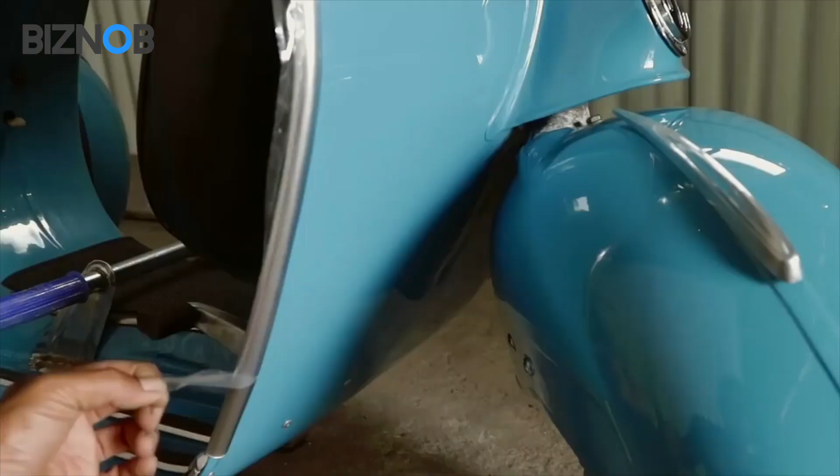Today, we're taking you on an exclusive journey into the world of Vespa scooters. Ever wondered how these iconic scooters are crafted? From their sleek design to their efficient engines, we'll explore the meticulous process that goes into making each Vespa. Stay tuned as we uncover the secrets behind one of the most beloved names in transportation. Let's get started.

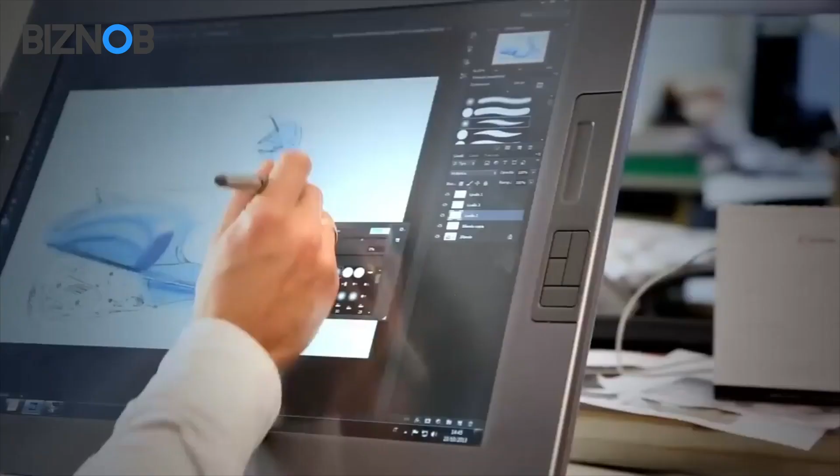1. Design and engineering. The process of designing a Vespa begins with extensive research and development to create a blueprint that balances functionality, aesthetics, and safety. Designers work closely with engineers to translate conceptual sketches into detailed technical drawings using computer-aided design (CAD) software. This stage involves brainstorming ideas, exploring various design concepts, and conducting feasibility studies to ensure that the final design meets the brand's standards and objectives.

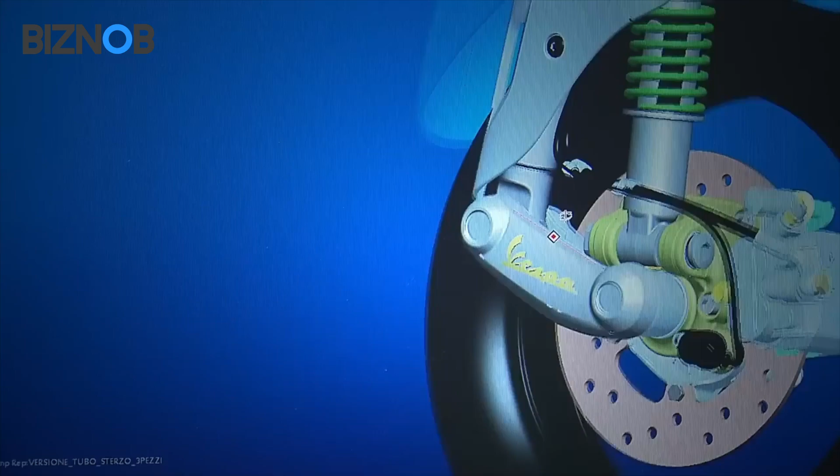Once the initial design phase is complete, engineers conduct virtual simulations and prototypes to test the scooter's performance, durability, and safety features. This iterative process allows them to identify potential design flaws or manufacturing challenges and make necessary adjustments before moving to the production stage.

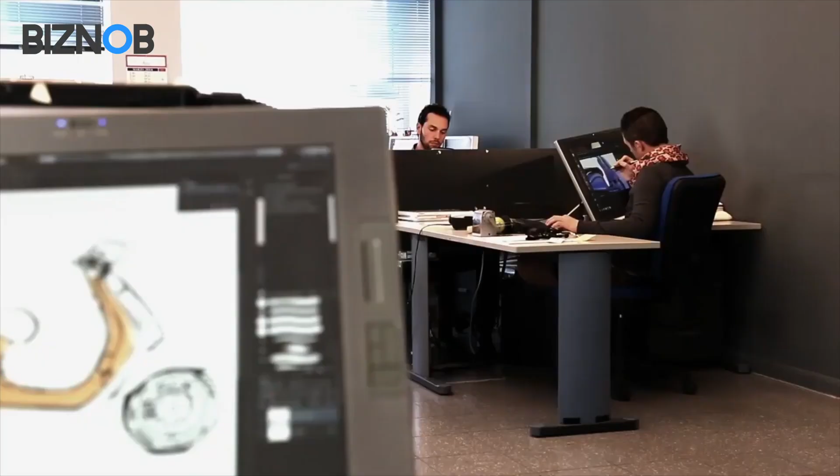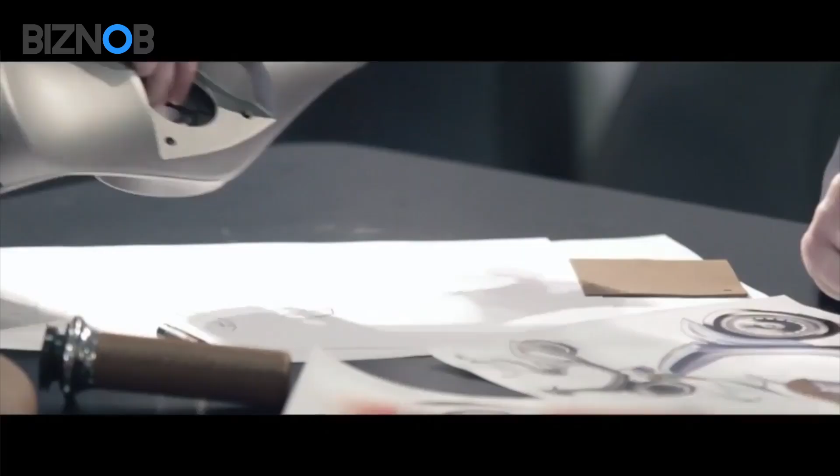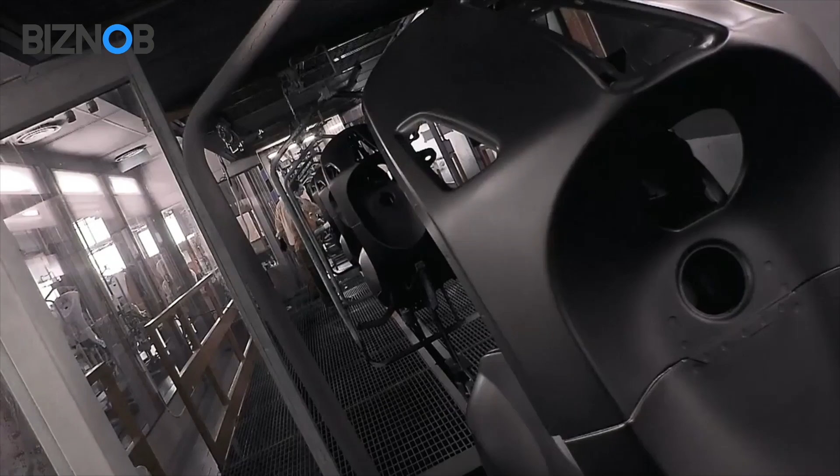2. Material selection. Selecting the right materials is crucial for ensuring the quality and durability of the Vespa scooter. Engineers consider factors such as strength, weight, corrosion resistance, and cost when choosing materials for different components. Vespa scooters are renowned for their steel bodies, which provide rigidity and structural integrity while maintaining a lightweight design. High-quality steel alloys are selected for their strength-to-weight ratio, allowing for optimal performance and durability.

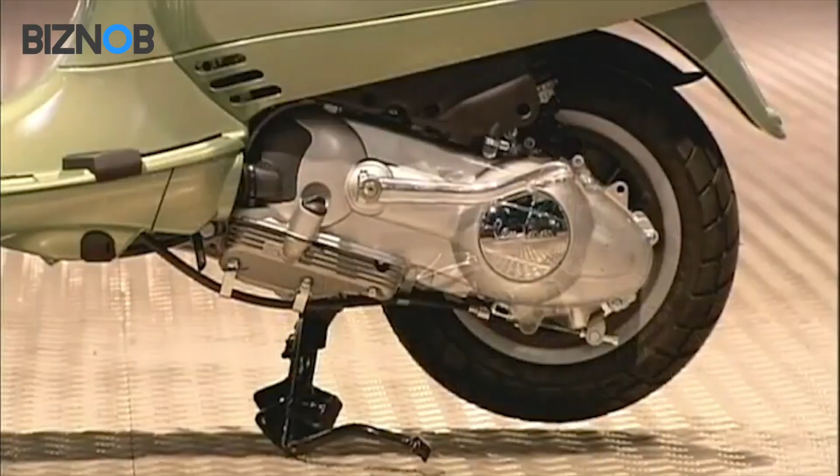In addition to steel, other materials such as plastics, rubber, aluminum, and composites are used for various components such as body panels, trim pieces, seats, and handlebars. Each material is chosen based on its specific properties and suitability for the intended application, ensuring that the scooter meets stringent quality standards and regulatory requirements.

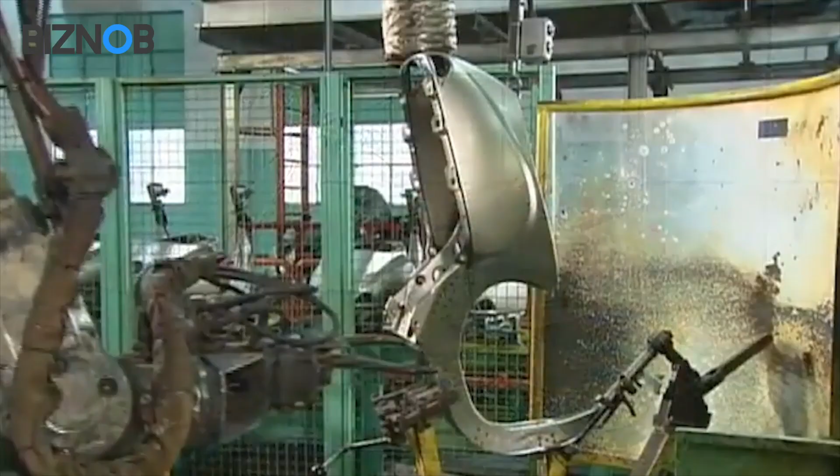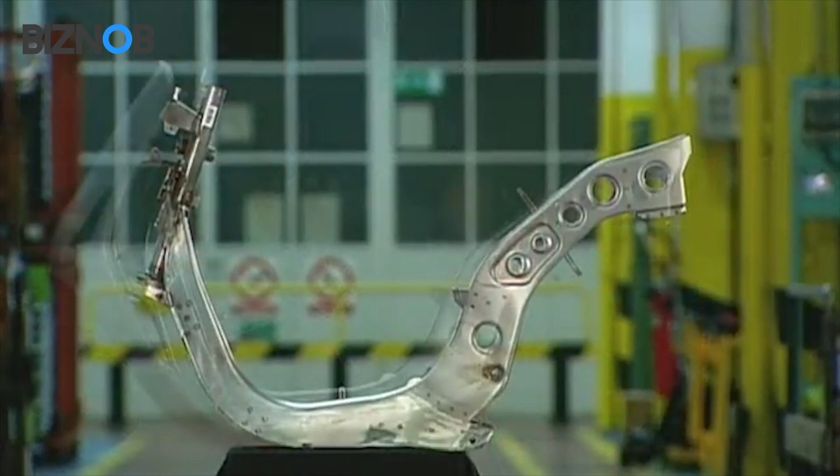3. Chassis fabrication. The chassis serves as the backbone of the Vespa scooter, providing support and structural integrity. In the fabrication process, 3 pieces of molded steel are joined together using robotic welding technology. These precision welds create a seamless and robust chassis that forms the scooter's foundation. The use of robotics ensures consistency and accuracy in the welding process, resulting in a high-quality finished product.

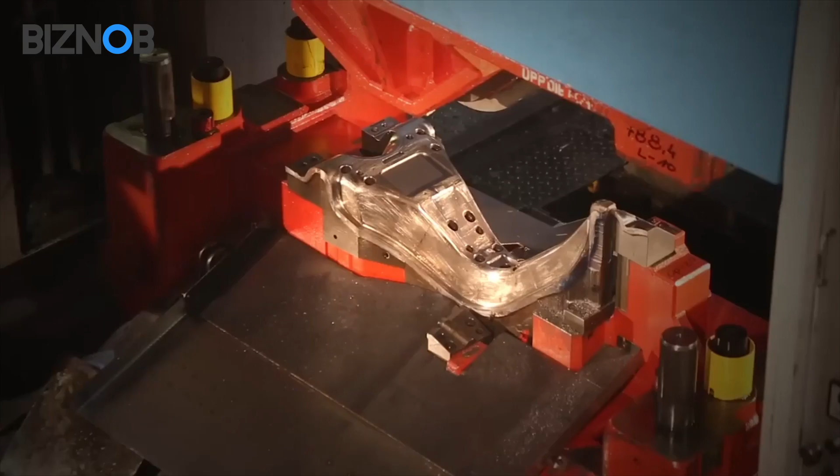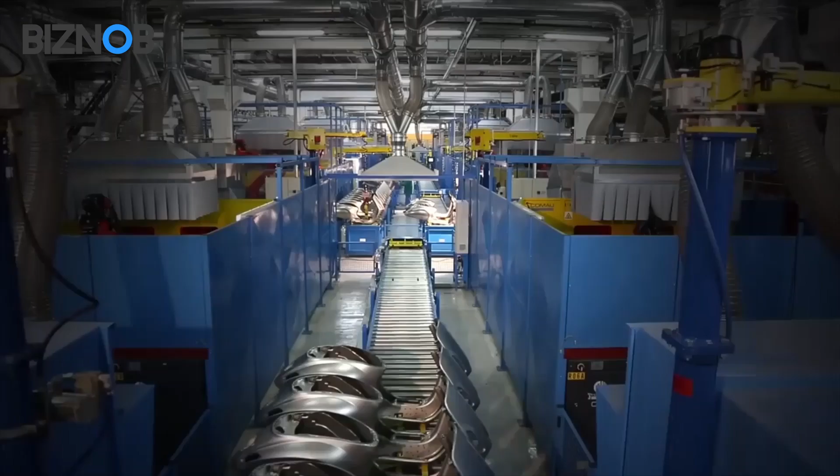After welding, the chassis undergoes additional processing steps such as rust-proofing, priming, and painting to enhance its durability and aesthetic appeal. This meticulous fabrication process is essential for ensuring that the Vespa scooter meets the brand's standards for quality, reliability, and performance.

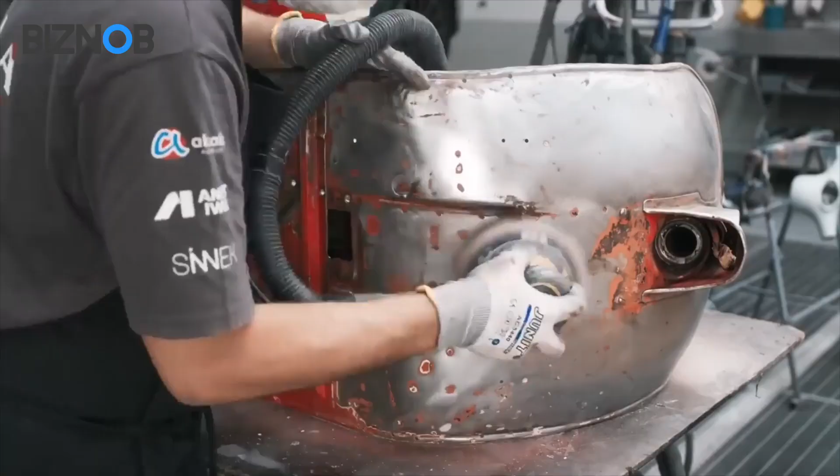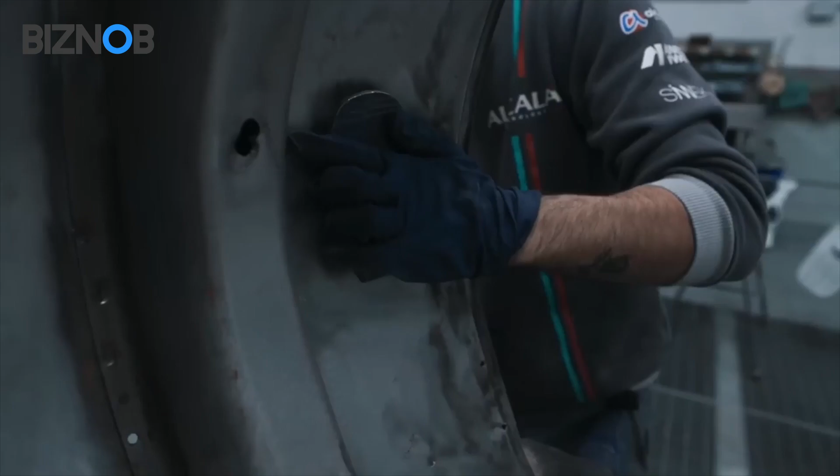4. Rust-proofing. To protect the steel chassis from corrosion and rust, it undergoes a specialized rust-proofing treatment. This involves applying chemical coatings or treatments to the metal surface to create a barrier that prevents moisture and oxygen from reaching the steel. Rust-proofing is especially important for scooters that are exposed to harsh environmental conditions such as rain, snow, and salt on roads.

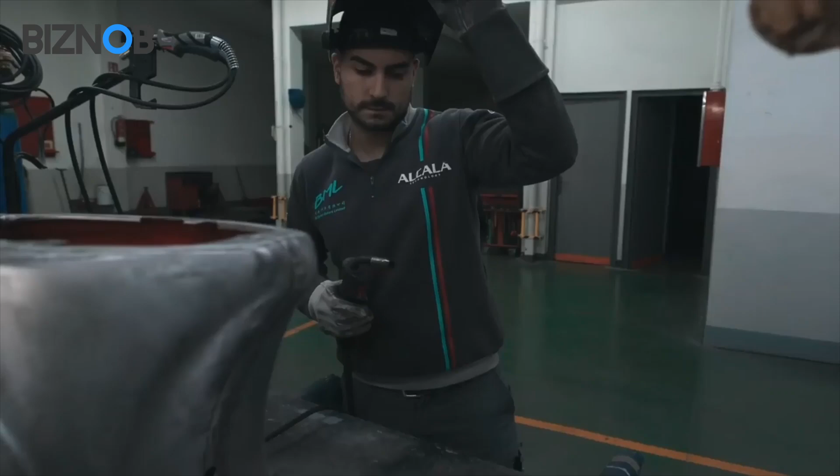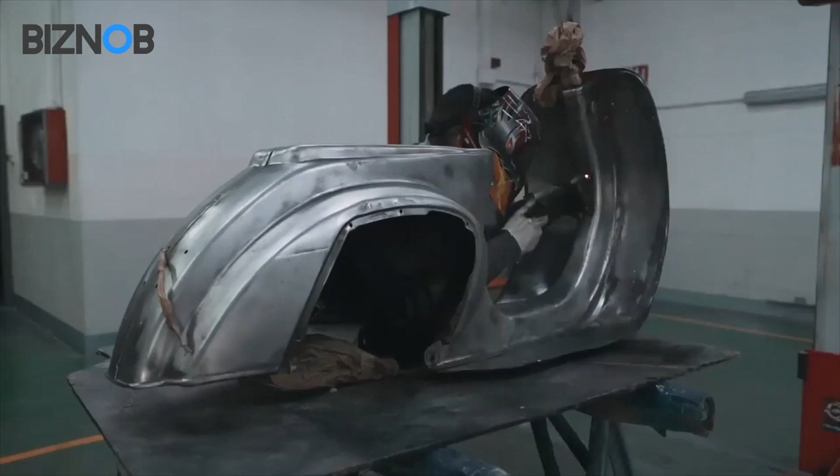The rust-proofing process may include techniques such as electroplating, hot-dip galvanizing, or applying corrosion-resistant coatings. These treatments provide long-lasting protection against rust and corrosion, extending the scooter's lifespan and maintaining its structural integrity over time.

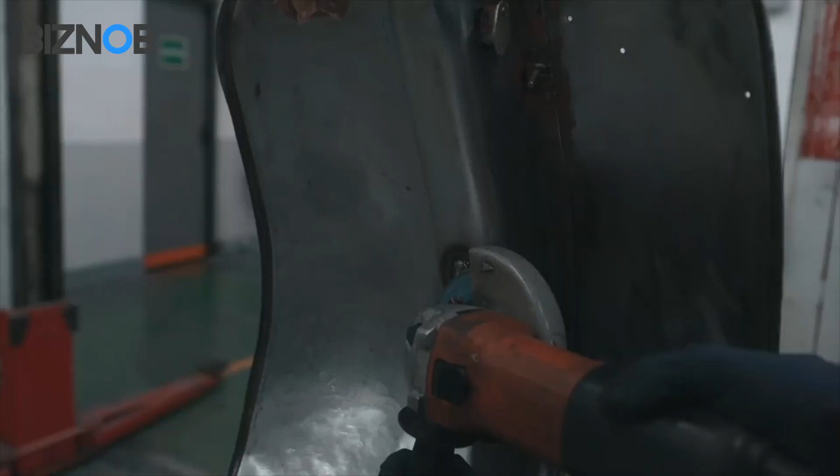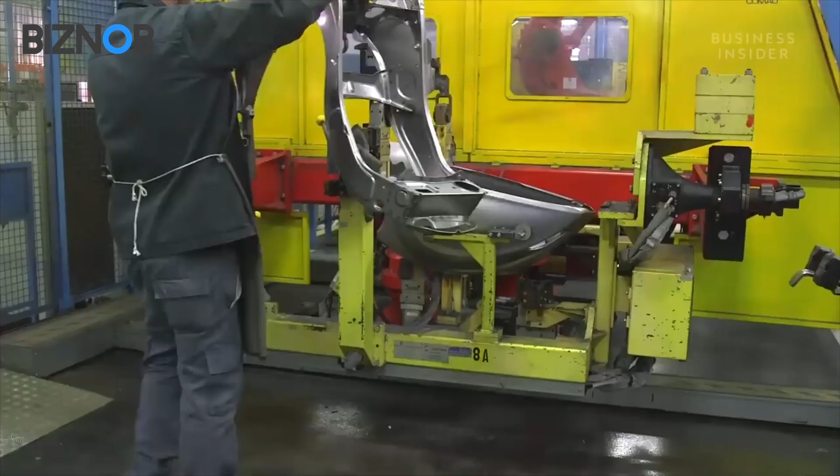5. Priming. After rust-proofing, the chassis is primed to prepare it for painting. Primer serves as a bonding agent between the metal surface and the paint, ensuring better adhesion and durability of the finish. The primer also helps to smooth out any imperfections in the metal surface and provides a uniform base for the paint layers. Different types of primers may be used depending on the scooter's final color and finish.

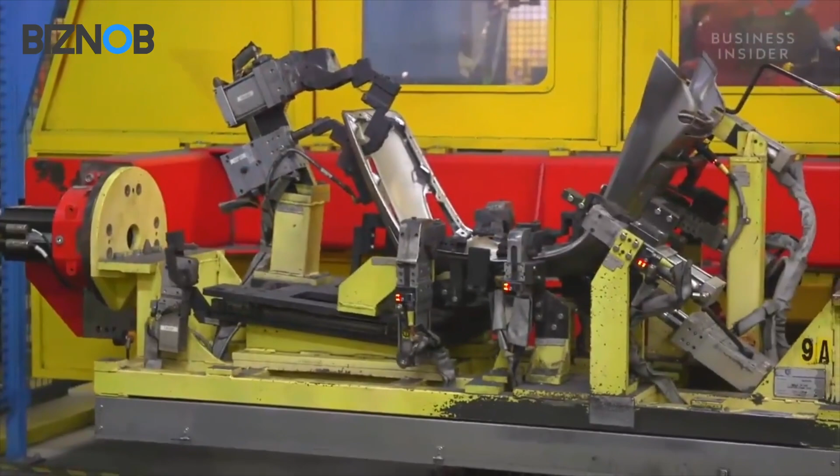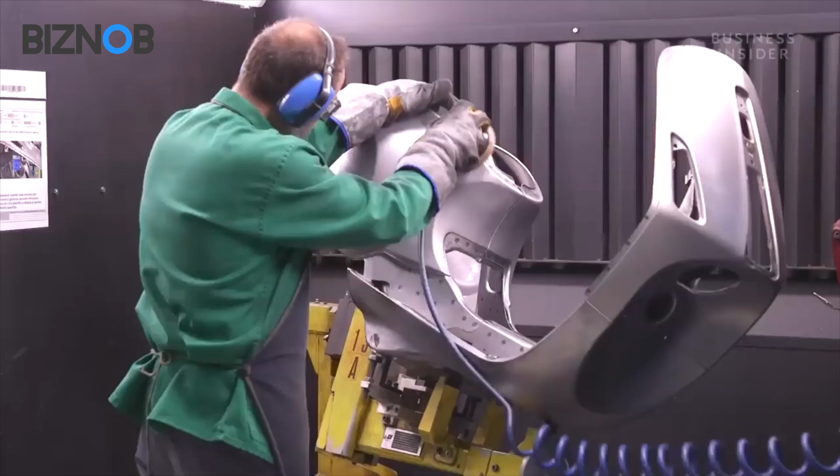For example, a black or gray primer may be used for darker colored scooters, while a white primer may be used for lighter colored ones. The choice of primer is critical for achieving the desired color vibrancy and finish quality in the final paint job.

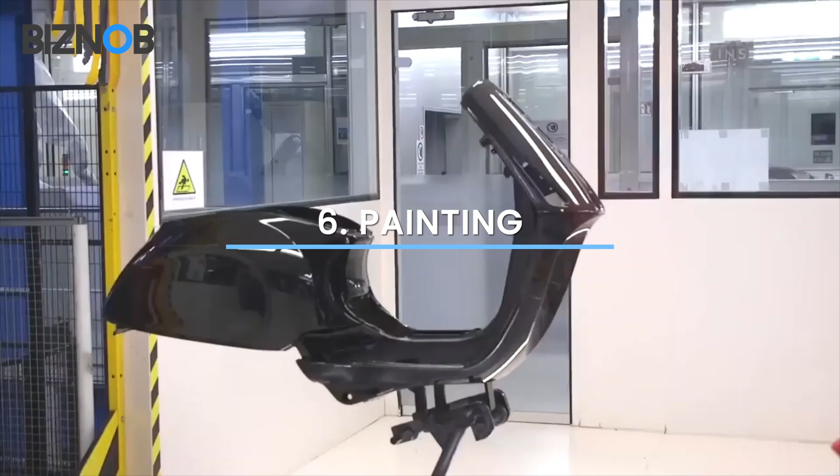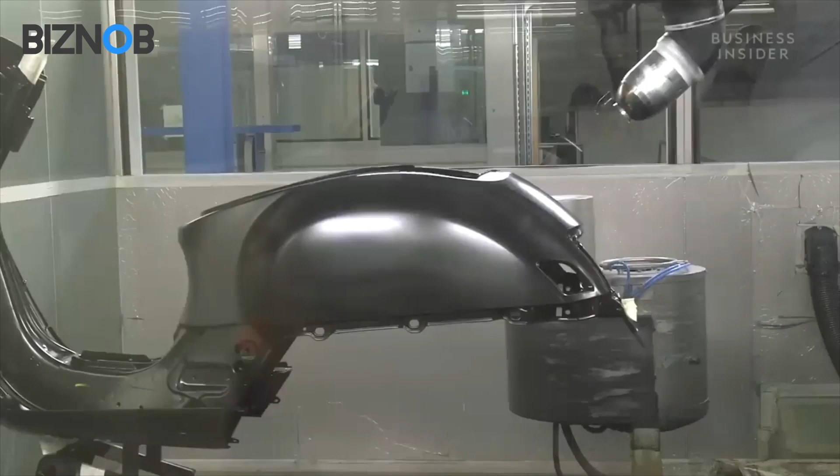6. Painting. The painting process is a critical step in creating the iconic look of the Vespa scooter. Multiple layers of paint, including a base coat, color coat, and clear protective veneer, are applied to the primed chassis. Each layer is applied with precision to ensure even coverage and a flawless finish.

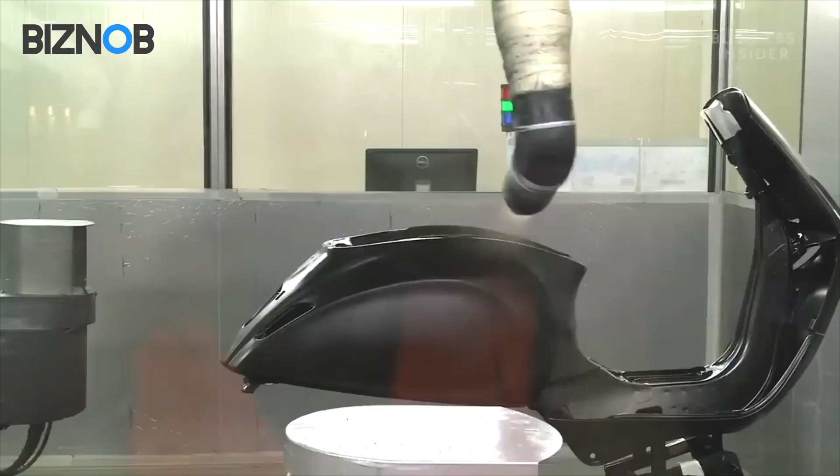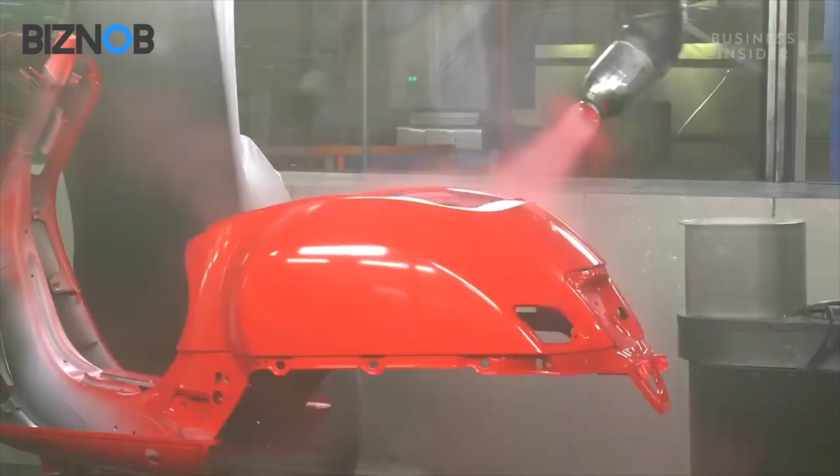Automated painting booths are used to apply the paint layers efficiently and uniformly, while skilled technicians oversee the process to ensure quality control. The paint is then cured by baking it in ovens at high temperatures, which helps to harden the finish and enhance its durability. Once cured, the painted chassis undergoes polishing to remove any imperfections and achieve a smooth, glossy surface.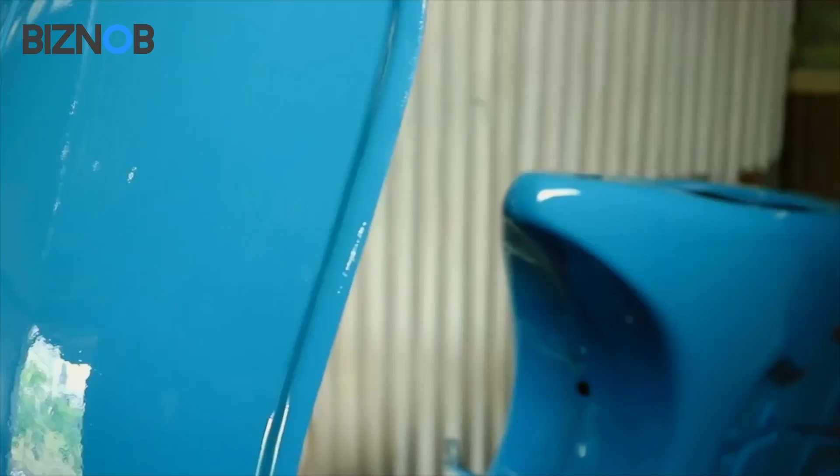7. Polishing. After painting, the chassis undergoes a polishing process to enhance its appearance and smooth out any surface imperfections. Skilled technicians use buffing machines and polishing compounds to achieve a high-gloss finish that improves the scooter's aesthetic appeal. This meticulous polishing process ensures that the paintwork is flawless and free of any blemishes or defects.

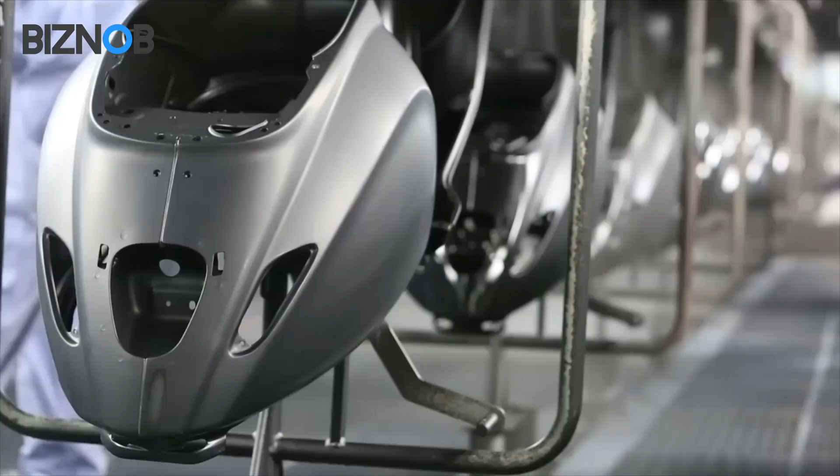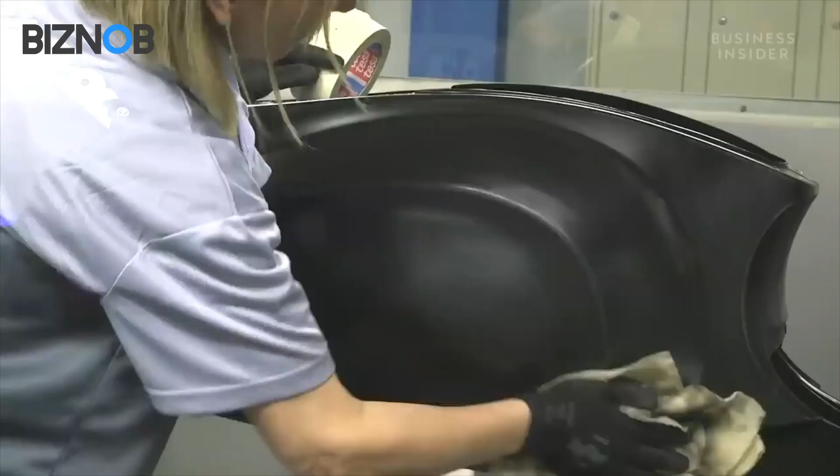Polishing also helps to protect the painted surface from environmental damage, such as scratches, UV exposure, and oxidation. By creating a smooth and reflective surface, polishing enhances the scooter's visual impact and contributes to its iconic look and feel. This attention to detail is essential for maintaining the brand's reputation for quality and craftsmanship.

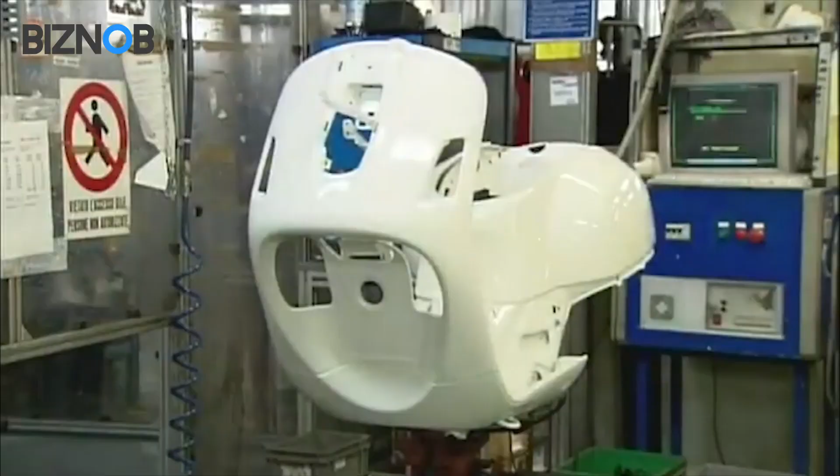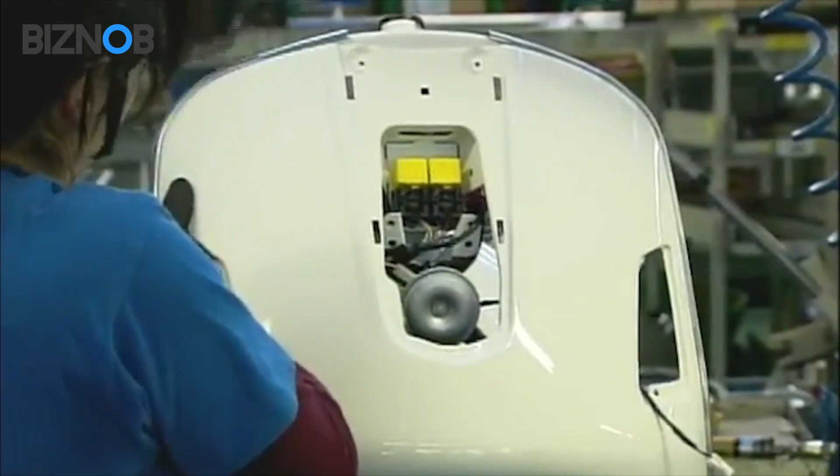8. Radiator system installation. The radiator system plays a crucial role in regulating the engine temperature and preventing overheating. During installation, technicians fit the radiator onto the chassis and secure it using mounting brackets and fasteners. They also connect the radiator's wiring and hoses to the vehicle's framework, ensuring a secure and leak-free connection.

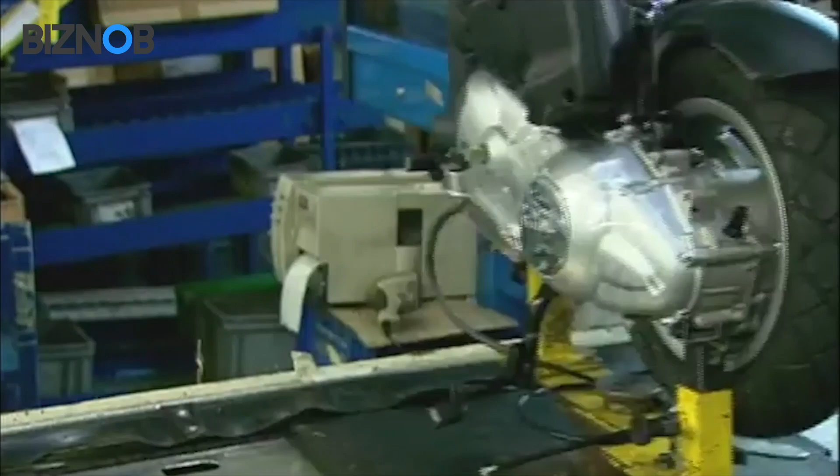The radiator system is essential for maintaining the engine's optimal operating temperature, especially during extended periods of use or in hot weather conditions. Proper installation and maintenance of the radiator system are critical for ensuring the scooter's reliability and performance on the road.

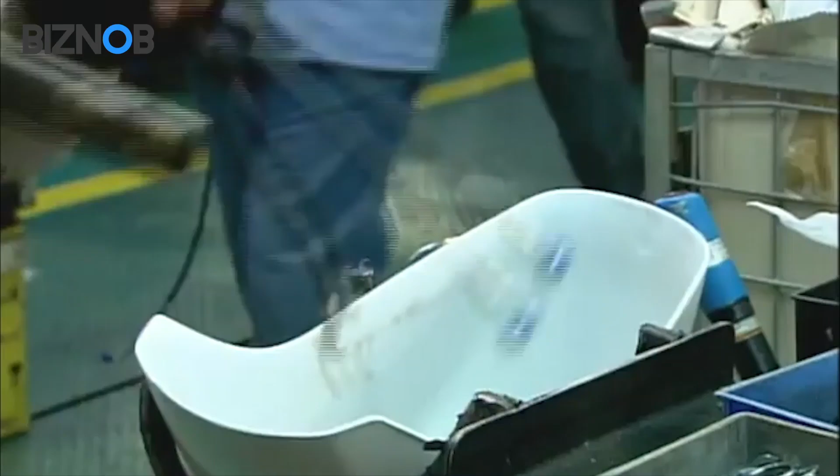9. Engine assembly. The heart of the Vespa scooter is its engine, which provides the power and performance necessary for smooth and efficient operation. During assembly, technicians install the engine beneath the passenger seat and bolt it to the steel framework of the chassis. This step requires precision and attention to detail to ensure proper alignment and attachment of the engine components.

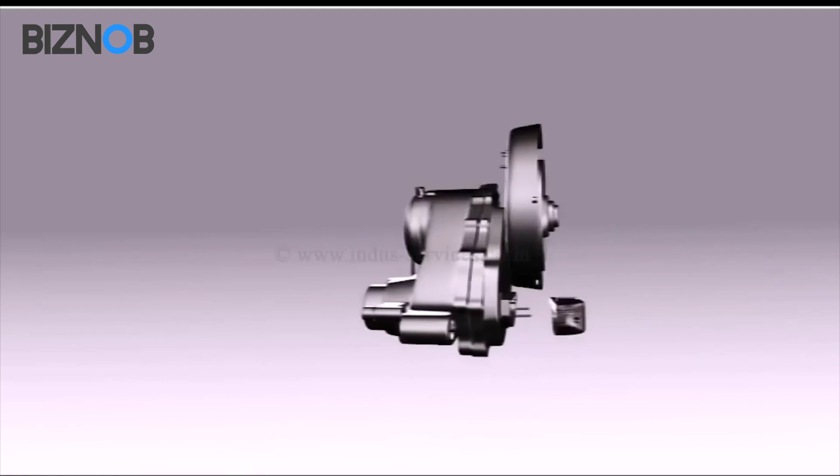Vespa scooters are typically equipped with 4-stroke engines ranging in displacement from 50 cc to 300 cc, depending on the model and intended use. These engines are known for their balance of power, fuel efficiency, and low emissions, making them ideal for urban commuting and recreational riding.

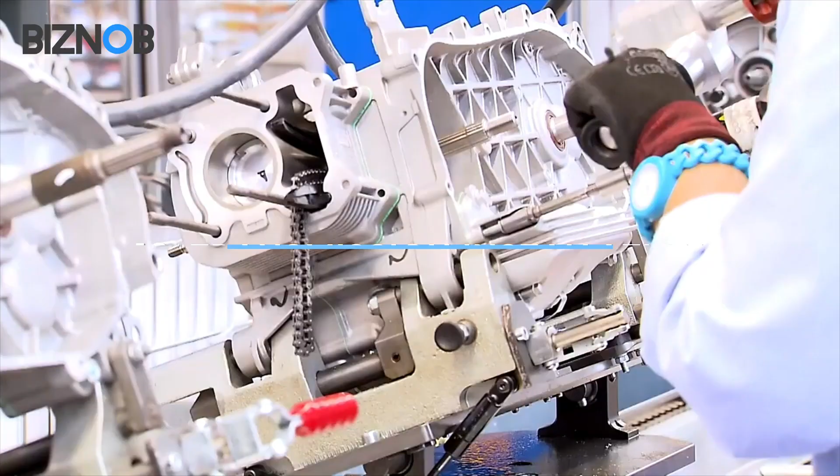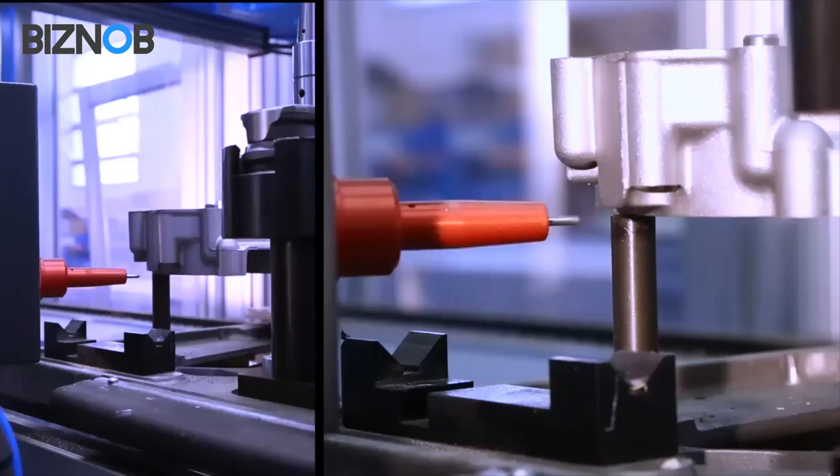10. Transmission installation. In addition to the engine, Vespa scooters are equipped with automatic transmissions that provide smooth and seamless power delivery. During assembly, technicians install the transmission alongside the engine and ensure that it is properly aligned and connected. Automatic transmissions offer ease of use and convenience, allowing riders to focus on the road without the need for manual shifting.

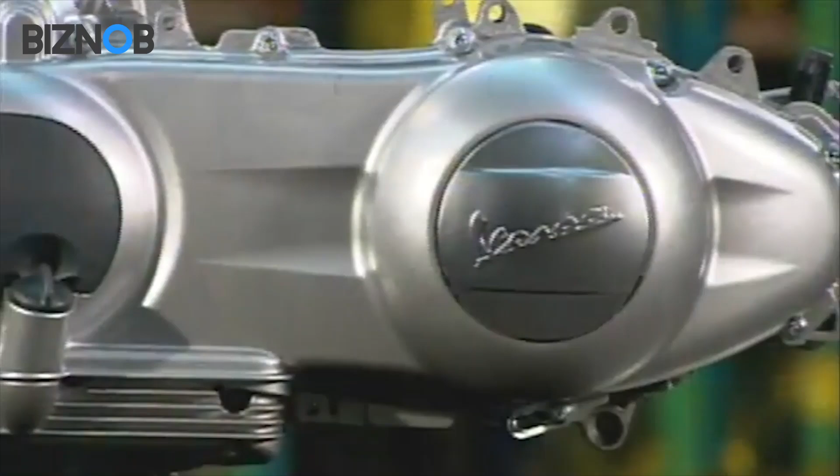The transmission system plays a crucial role in transferring power from the engine to the wheels, allowing the scooter to accelerate smoothly and efficiently. Proper installation and adjustment of the transmission components are essential for ensuring optimal performance and longevity of the scooter.

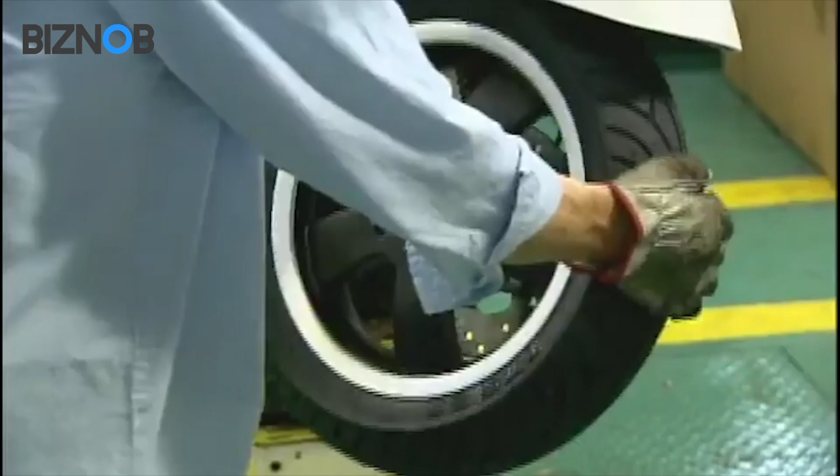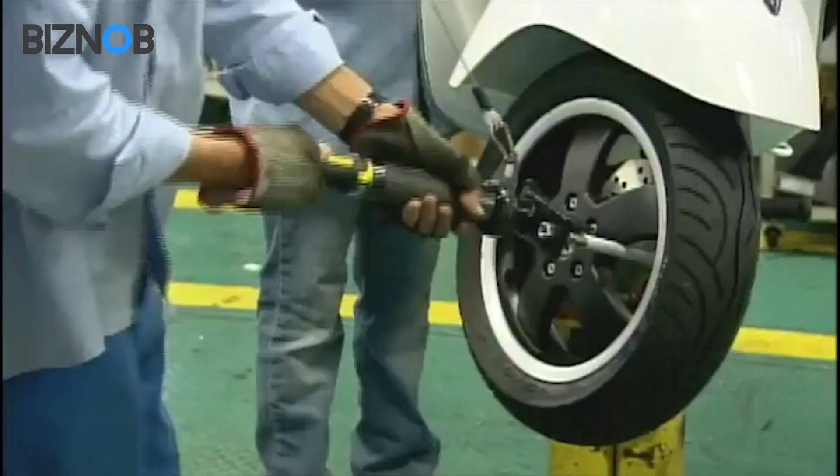11. Steering column and front wheel assembly. The steering column, which includes the front brakes and wheel hub, is assembled next and inserted into its slot at the front of the scooter body. Skilled technicians carefully assemble the steering column and front wheel, ensuring proper alignment and attachment to the chassis. The front wheel, typically equipped with a larger 12-inch rim for added stability, is then installed and secured in place.

The steering column and front wheel assembly are critical components of the scooter's steering and braking system. They allow for precise control and maneuverability on the road. Proper installation and alignment of these components are essential for ensuring the scooter's safety and performance.

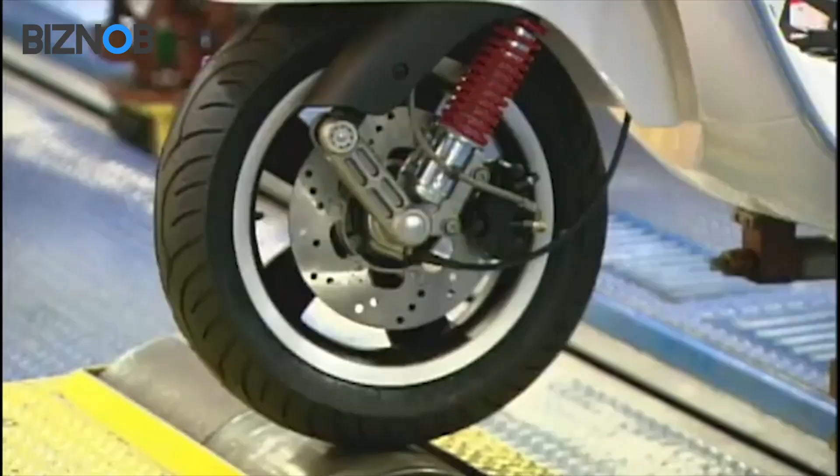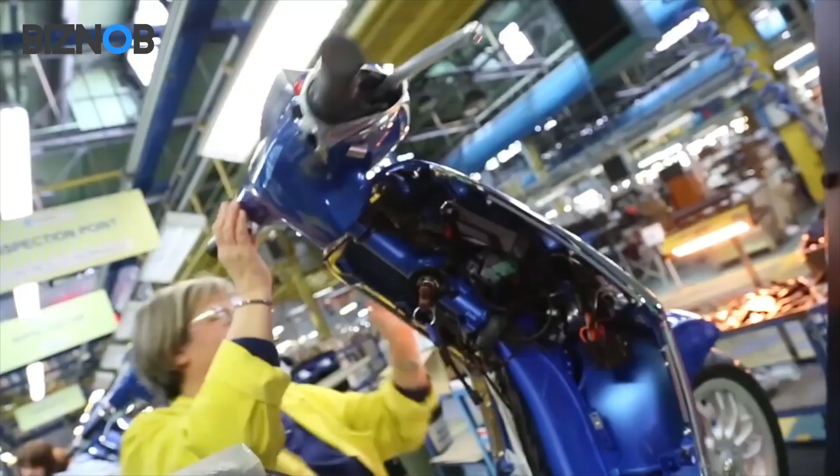12. Headlight and electrical systems. Vespa scooters are equipped with headlights and electrical systems that provide illumination and functionality on the road. During assembly, technicians mount the headlight onto the handlebar and connect it to the scooter's electrical system.

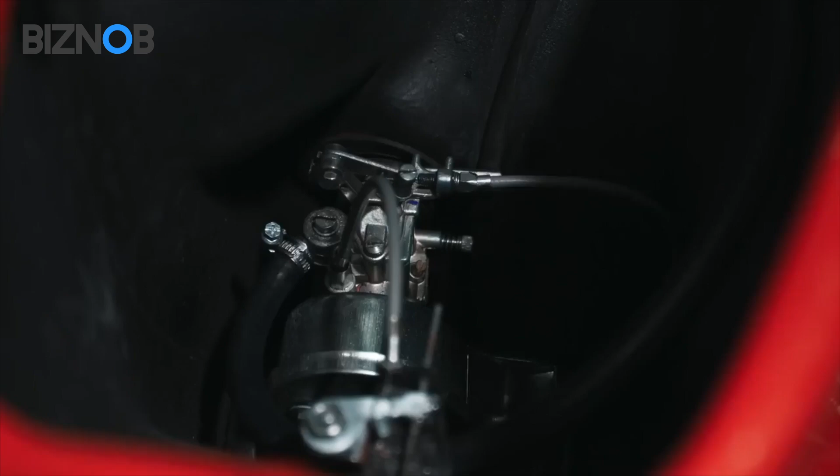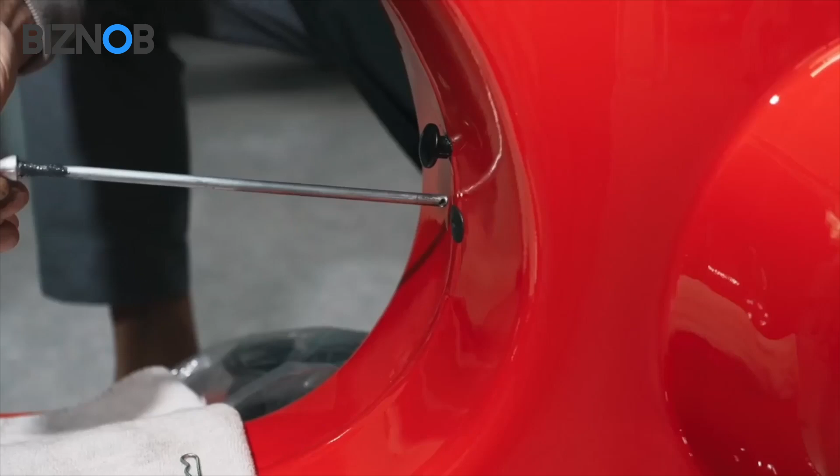They also install other electrical components, such as signal lights, speed gauges, and wiring harnesses, ensuring that everything is connected correctly and functional. The electrical system powers various scooter accessories and features, including lights, indicators, and instrumentation. Proper installation and testing of the electrical components are essential for ensuring the scooter's safety and compliance with regulatory standards.

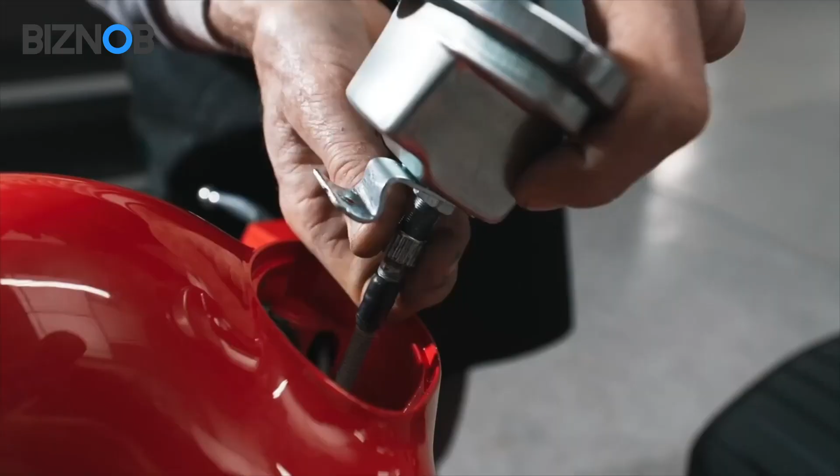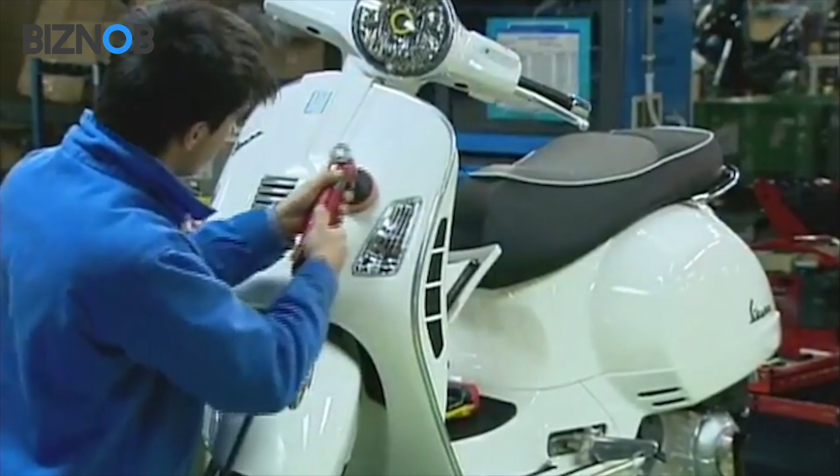13. Final assembly and accessories. Once the major components are installed, the scooter undergoes final assembly, where trim pieces, accessories, and finishing touches are added. Technicians install the horn cover, trim pieces, and saddle, ensuring that everything is aligned correctly and secured. The saddle is mounted on a hinge over a storage compartment, providing both comfort for the rider and practical storage space for belongings.

Accessories such as pop-out footrests for the passenger are also installed during this stage, enhancing the scooter's functionality and convenience. Skilled technicians pay close attention to detail during final assembly to ensure that every component is installed correctly and meets the brand's standards for quality and craftsmanship.

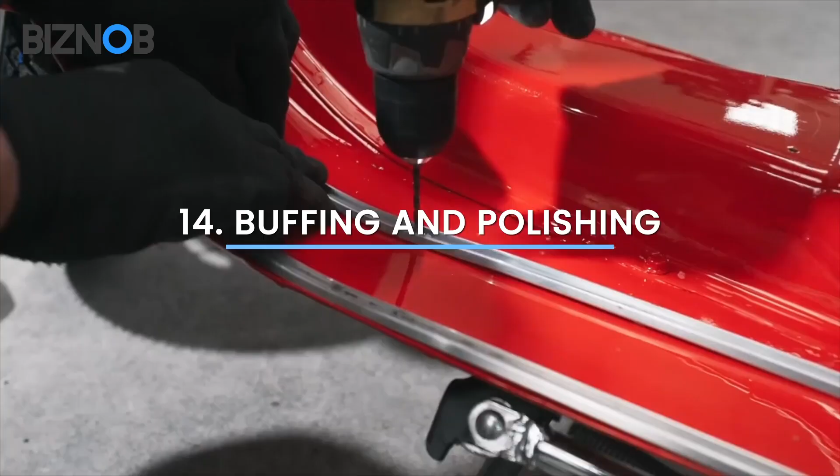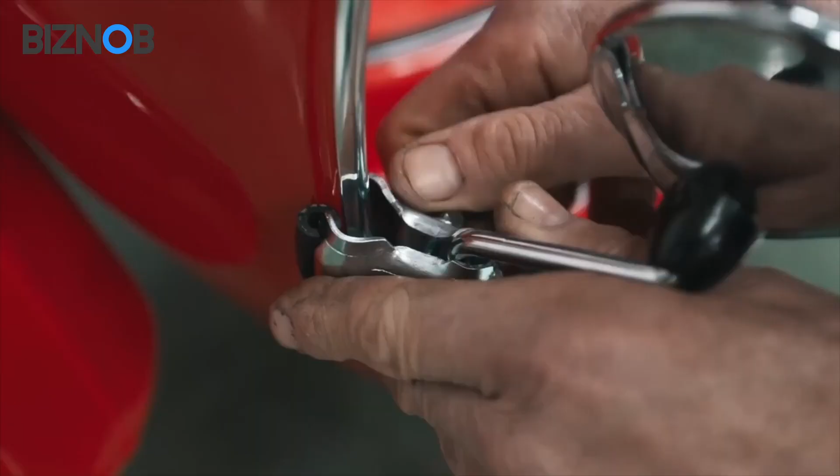14. Buffing and polishing. Before the scooter is completed, it undergoes another round of buffing and polishing to enhance its appearance and finish. Skilled technicians use buffing machines and polishing compounds to achieve a high gloss shine and remove any surface imperfections. This meticulous process ensures that the scooter has a flawless and uniform finish, enhancing its aesthetic appeal and visual impact on the road.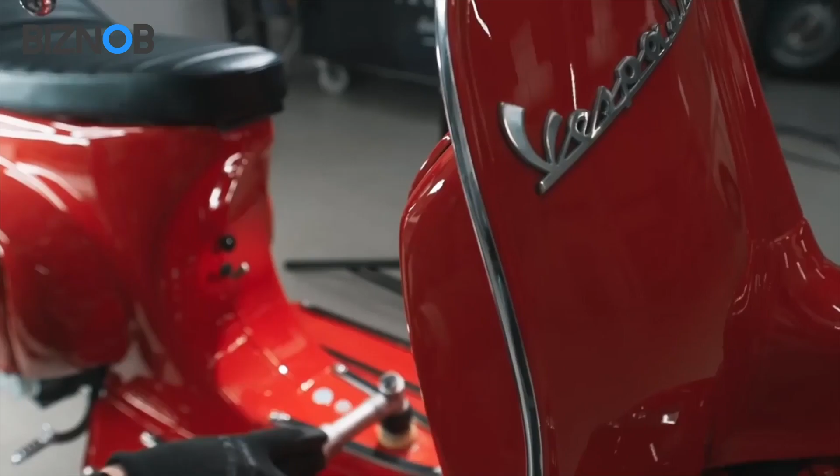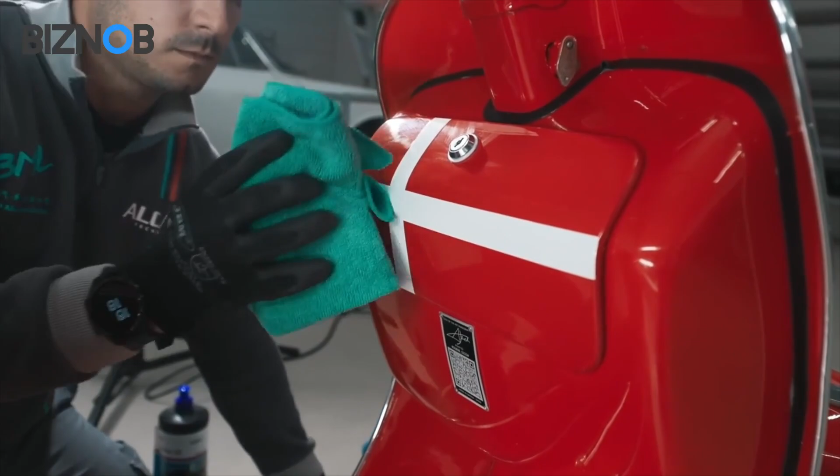Buffing and polishing also helps to protect the painted surface from environmental damage, such as scratches, UV exposure, and oxidation. By creating a smooth and reflective surface, buffing and polishing contribute to the scooter's iconic look and feel, ensuring that it stands out from the crowd.

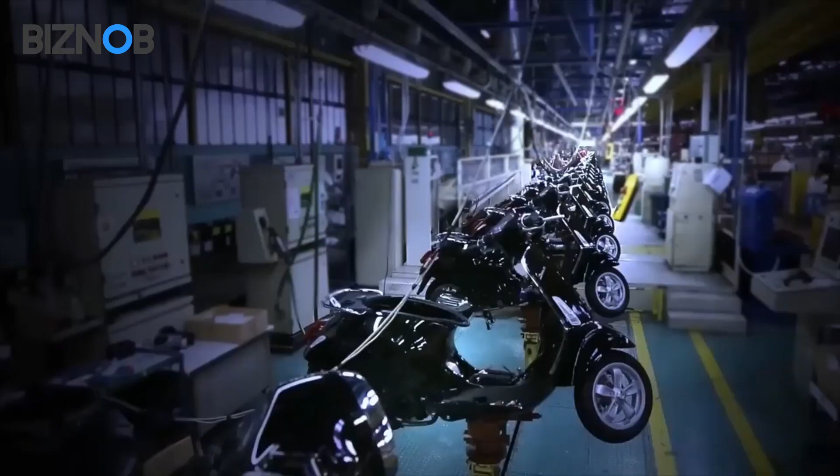15. Quality inspection. The final step in the manufacturing process is a comprehensive quality inspection to ensure that the scooter meets the brand's standards for quality, safety, and performance. A team of skilled inspectors scrutinizes every aspect of the scooter, checking for any defects, flaws, or inconsistencies. They examine the chassis, engine, electrical systems, and cosmetic finishes to ensure that everything meets the brand's specifications.

Only after passing this rigorous inspection is the scooter deemed ready for sale. This final quality check ensures that each Vespa scooter meets the brand's reputation for excellence and craftsmanship, providing customers with a reliable and high-quality product that they can trust on the road. Into the world of Vespa manufacturing. We hope you enjoyed learning about the intricate process and craftsmanship that goes into making these iconic scooters.